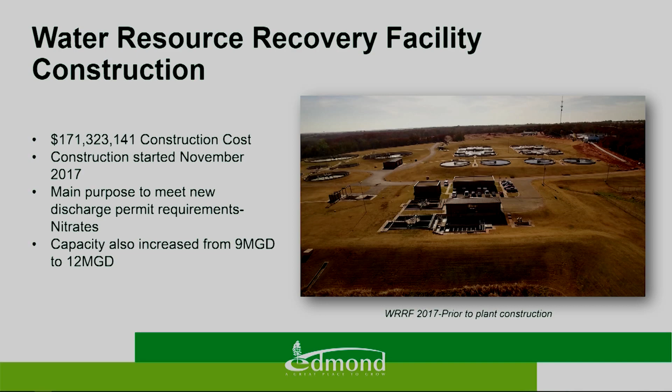2022, the second phase of water plant construction, then 2022 also the intake, and then to be determined on last phases. That's a brief recap on the Water Resource Recovery Facility or sewer plant or wastewater plant, whichever you want to call it. It's a $171 million project, started in November of 2017. The main purpose was to meet the new discharge permit requirements, primarily nitrates. We renegotiated that schedule several times, and we are meeting the nitrate limits under this permit.

We are also increasing capacity from 9 million gallons to 12 million gallons a day. It allows Edmond to grow. We had to add a lot of facilities to meet these nutrient requirements, and while we were doing the project, we wanted to get the whole thing done. So most processes were replaced. Basically we're reusing a few of the pieces of concrete out there, primarily some basins. The last plant expansion before this one was in '94. Previous to that was '86, and then 1972 original.

The facultative treatment lagoons. Oh boy. Okay. Where's the laser?

These lagoons, replacing with the aerobic digester process. Basically right now, spring and fall, we know that we have neighbors because they can smell the plant. It's caused a lot of complaints because of those, but we do our best to mitigate them, and we can't control the weather, but we do try to address the concerns and let the neighbors know what's going on. And we're having a meeting with them this week. This process is currently scheduled to be operational in June of '23.

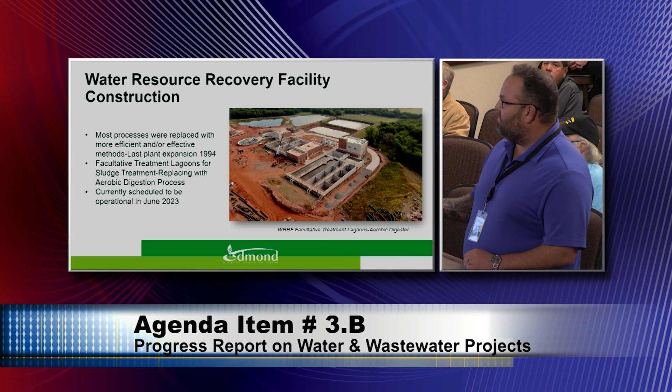Another process is the disinfection building. Currently, we use chlorine gas, obviously, with all the neighbors in the area. We've got to maintain a risk management program for that. It's not a good long-term plan for us, so we went with UV disinfection. It basically feeds some UV light to the bugs and it sterilizes them, and then there's no more E. coli. So that's scheduled to be complete in August of '23, and project completion scheduled for the end of '23.

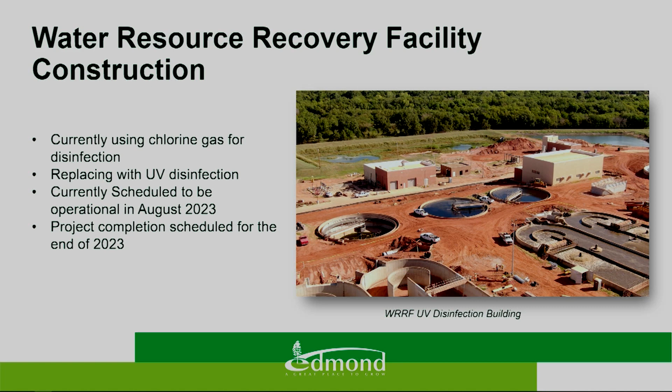And then this is just an overview from the other side. Dwight comes out and takes these pictures and does a great job, and we've cataloged the progress as we went. This is the aeration basins that are currently under construction now.

So on to the water plant expansion. This was a view of the water plant in October of 2019, where the new control building is, and then lots of dirt. So the first phase was $38 million, and it's nearly complete. We were working on some startup of equipment, and I've got a picture of that coming up. Second phase, we're all well aware that was significantly more expensive than anticipated, $191 million. Started construction in July of '22.

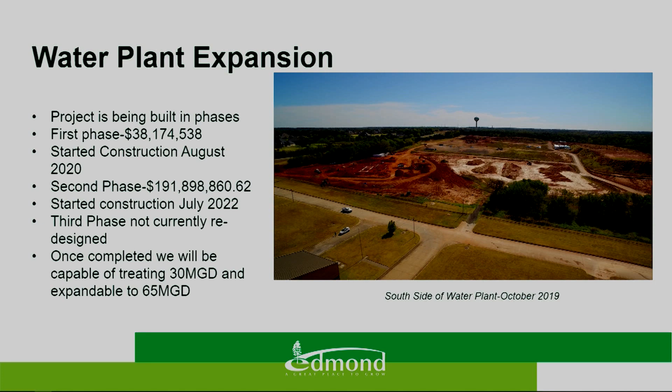And then third phase, not currently re-designed. We're negotiating a design contract on that. And once completed, we'll be able to treat 30 million gallons a day. Currently, we can do 12 million gallons a day out of the water plant, and expandable to 65 million gallons a day. If you remember, our current water plant is locked in at 12 million gallons a day, and we couldn't get more out of the lake through the existing infrastructure.

So first phase, this is it. It's the nice piece of sod and concrete right next to all the dirt out there. But it's shaping up really nice. Primary purpose is to get rid of the lime solids from the treatment process, and expected to be operational in January. We were hoping for November. There's been a lot of pushback, delays on even a piece of steel, a piece of pipe, a window, just things like that have set us back. But they're making good progress, and this was taken last month.

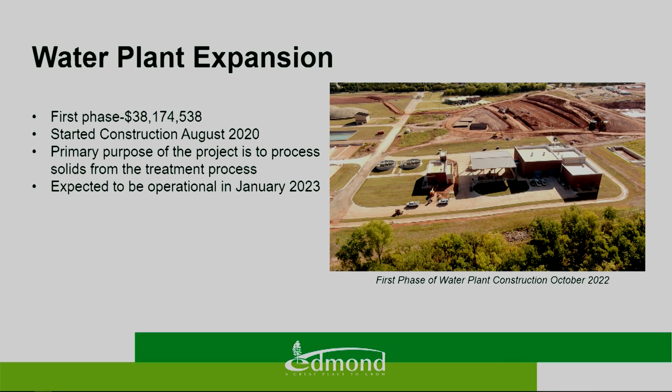Second phase, primarily moving dirt right now. Purpose of the project is our granular activated carbon filters. Those keep us from having to do chloramines, and it removes a lot of impurities out of the water. Backwash recycle facilities, electrical infrastructure and backup power, and then pumping and storage, so new pumping facilities to get it out to the city.

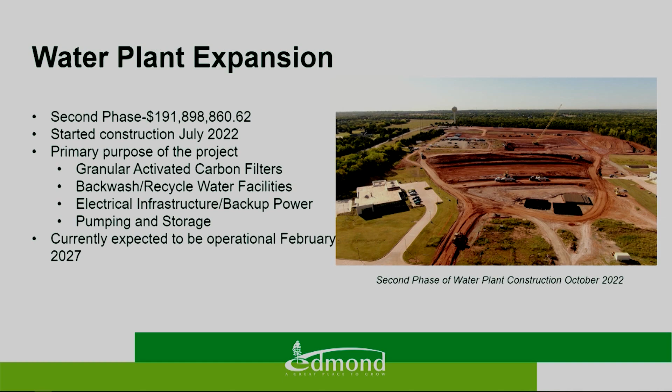Just to highlight the electrical infrastructure and backup power, one of the reasons back in the polar vortex that came through, as I like to call it, but one of the things that we were able to do then, and we will be able to do in the future, is get off the grid to help keep our customers from having to go out of power, which was a nice convenience for everyone back then when we were having to shut power off. This phase is currently expected to be operational in February of '27.

Third phase estimated at $200 million plus. Redesign will start in 2023, and that will basically finish out the project. It's ozone treatment, lime softening, which is the main process, and then chemical buildings and filters.

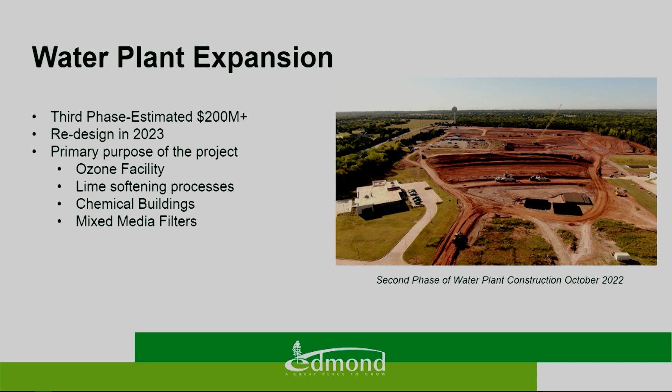Intake project, this one's very visible. If you go out by the park office and overlook area, which is right over in here, the contractors created a temporary path out to the overlook, and then this will be where the shaft is. Basically, they're going to drill down 70 feet deep and 50 feet across, and then we'll run a tunneling machine out into the lake and be able to pull water in. So they'll build a pump station on top of this.

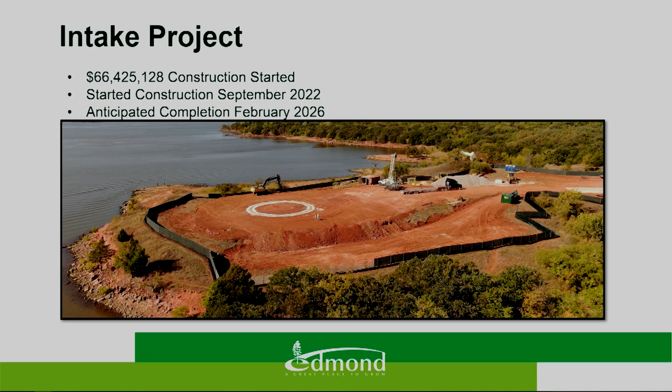And that's just another view. Our old intake is limited at 12 million gallons a day. New intake, 30 million gallons, expandable to 65 million gallons a day, which is basically just changing pumps out.

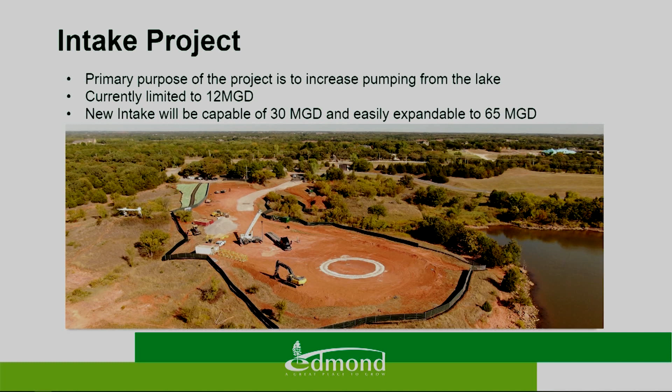And one that's caught a lot of attention, near 66 and Post. We're utilizing city property at that corner. We've drilled a couple wells and are building up the site with soil from the water plant expansion project. We maintained a 60-foot tree buffer along 66 and along Post Road. So I think a lot of people don't notice it. That was the goal with that. And then it's avoiding 10,000 plus trucks being on the road, which we will all be thankful for.

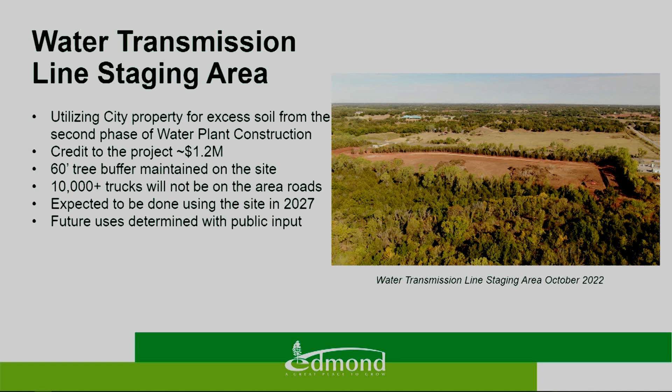We're expected to be done using this site in 2027, and then I know we're talking about it in the Arcadia Lake Master Plan, using that site for some future use and what city uses we need it for. So there'll be a lot of discussion on that one. And that was taken last month. They've moved quite a bit of dirt in there, but I didn't have a new picture.

Projects, all these projects are funded through water and wastewater rates and long-term debt, so that future customers are helping to pay for their fair share. We're primarily using state revolving fund loans and taking advantage of federal dollars. Just totaled up, so there's $24 million in federal funding that's applied basically through grants or principal forgiveness, and still working on a couple, but it's going good so far.

So we're working through the process on a $5 million grant that came through last fiscal year through Inhofe's office, and then currently working with Congresswoman Bice's office to secure another 5 and then state ARPA funds for 13. So all good news. And just a reminder, our monthly project updates are posted at edmondok.gov/projects, and then we do an annual update to the June 2019 revised water system master plan on our website.

Very good. Any questions? You guys do an incredible job out there. Thank you, I appreciate it. Takes a village on this one. Well, thanks for the update, because this is our largest project, I guess, on record that the city's done, and the updates really help out, keep the story out there.